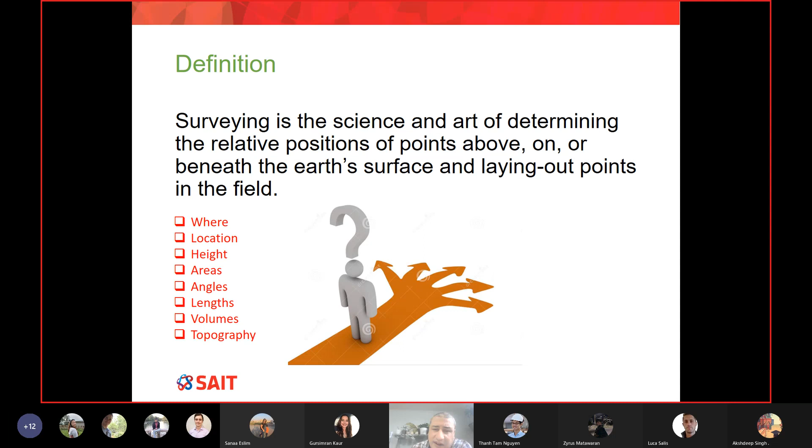Okay, let's start. Surveying is all about one word, one question. As soon as you ask the question 'where,' the answer is surveying. Whenever you say where, it means the answer comes from surveying. This question can expand - instead of just location, I can ask about height or height difference, areas, angles, length, volumes, topography, like where are the flat areas and where are the steep slopes. You can see from this slide it looks very simple - once you say where, we're doing surveying, okay? However, I can tell you, things will get complicated.

Surveying has so many branches, and every branch you can look at from a different perspective. You can classify surveying based on many aspects. We can classify it according to the area to be mapped. Sometimes we map a small area on the earth, and sometimes the area we want to map is as big as Alberta, or Canada, or the entire world.

Is it the same? Are we going to use the same equipment, the same procedure, the same calculation? The answer is no. We have different branches, and I will talk shortly in more detail about plane surveying and what is called geodetic surveying.

We can also look at surveying from a different perspective, which is the field of application or the objective. It means doing a tunnel survey is different from a deformation survey, or building a high-rise building, or doing surveying underwater. Yes, it is completely different - you need to change the entire procedure and sometimes use very specialized equipment.

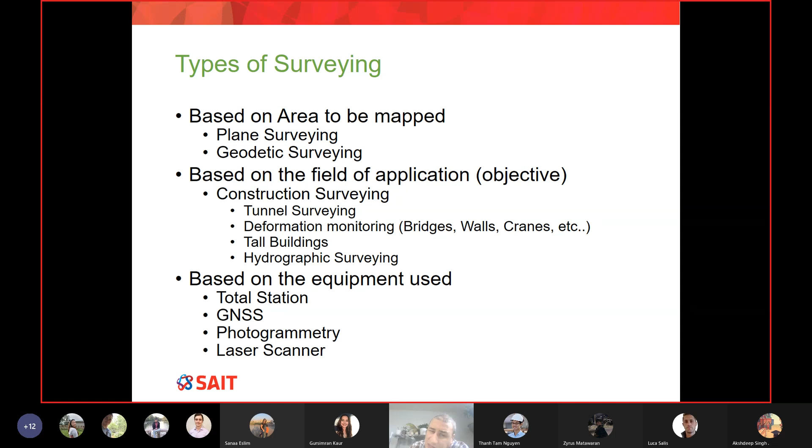So let's start and give you more information about each of those individual categories. Now let me ask you this question - what do you think about the actual shape of our Earth?

Anybody in this class still believe that our Earth is flat? I want to know - I'm interested to meet you if you still think our Earth is flat. Okay, so our Earth is not flat. However, it looks pretty much like a sphere. It's not really a perfect sphere, but pretty much like a sphere.

So how can this affect my survey? Now let me ask you this question - if you fix three points on the ground and you have equipment that can measure angles, which is a total station... for example, I have three points, point A, B, and P, and those three points are on the ground. I go ahead and measure the angles, like alpha, between line AB and AP.

Now let me ask you, when you measure those three internal angles of a triangle, what do you think - should the sum of these angles be a specific number? I need some help, please.

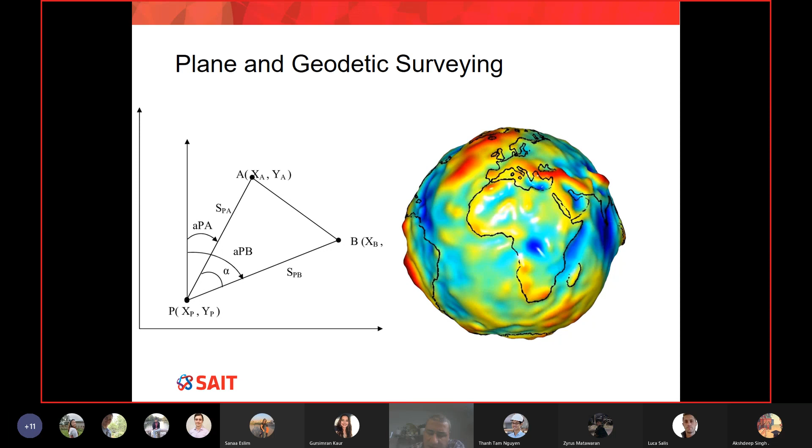You know what? I know that I have made a 30-second error in my measurement, if you agree. Now, you can see I used plane trigonometry to do my calculation. However, if I just expand the area, which means A and B and P are not close to each other...

What happens is if I simply take 3 points far apart, I will take it to the extreme. Let's say I have 3 points, alpha, beta, and gamma, and alpha happens to be on the North Pole, and beta and gamma are on the equator. Probably you're familiar with the words North Pole and equator, are you? Yes, I think so.

Okay, now let me ask you, please look at my screen, the picture on the right. As I said, I pushed the extreme, so I pushed these 3 points very far from each other. I'm asking you right now, do you still think the internal angles of this triangle, which is not really a plane triangle anymore, it is called a spherical triangle, do you think the sum of the internal angles is still 180? Yes or no?

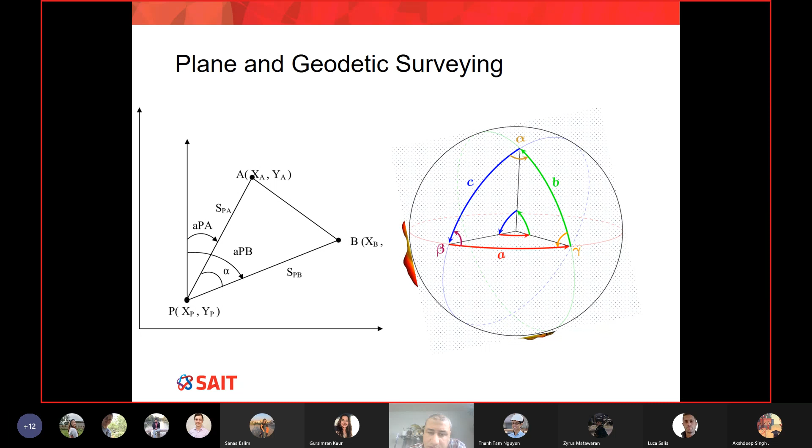And in my class, at the very end, before we end our semester, I will give you more information about geodetic surveying. Okay, that's only for now.

Now, let's take you to another domain, which is tunneling. So we are trying to build a tunnel, and we want our surveyor to help us build it. Because I can tell you, there is no construction without surveying. I want everyone to believe this. There is no construction without surveying. Without surveying, you cannot build almost anything. You cannot build anything without surveying.

So when you're trying to build a tunnel, and I think we have a few tunnels in Calgary, okay, anybody can give me an example of tunnels in Calgary similar to what you see on my screen? If you take the C-Train, you will know.

So tunnels are a complicated topic, and we can build them in two ways. The first and easiest one is what you see on my screen, simply called open cut or cut and cover. You just dig the ground, install your retaining wall, then if you need to cover it, make a box section, build the slab, and finally cover with soil, and it's good to go.

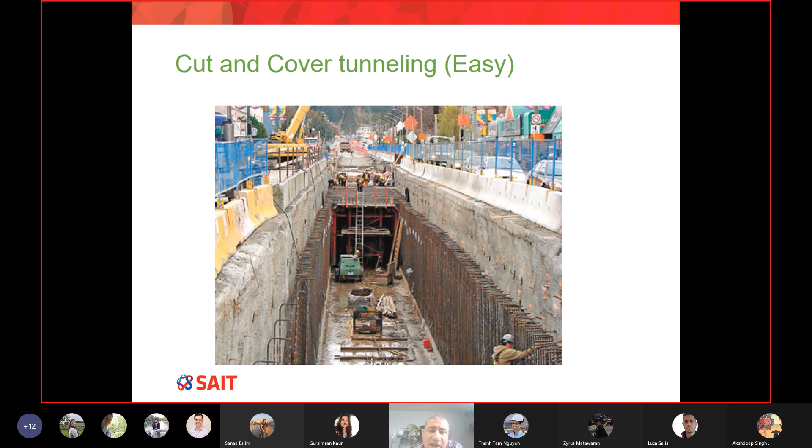The thing is, this technique doesn't work all the time. You know why? Because you have to make an open cut.

Look at this situation: you have a city that's already built, a few hundred years ago - like Cairo, built more than 1,000 years ago. Now the city is there and you don't have much space, and you have a transportation problem. You want to build an LRT. How can you do that? Should you demolish all the buildings, make the open cut, build the tunnel, cover it with soil, and then build all your buildings again? Unfortunately, this is not engineering.

So engineers came up with a marvel of a machine called the TBM, tunnel boring machine. Unfortunately, here in Canada we don't use it because we have lots of space. But in other areas of the world where space is very tight, this is the way to go.

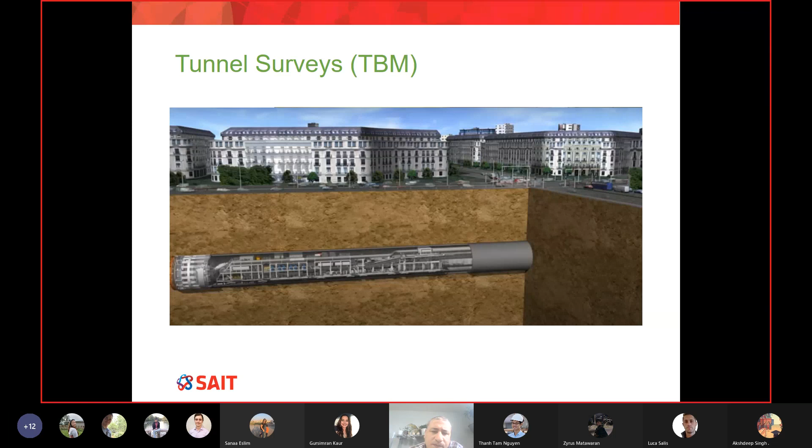I'm going to share a video with you, I think this one is from the UK. Let's see the video and see this marvel. My intention isn't to show exactly how this machine works in full, but to give you an idea of how these tunnels will be built. I won't show you the entire video, just about half, until you get the idea of how this machine works, and then we can move on to how surveying connects to this kind of work. Let's see.

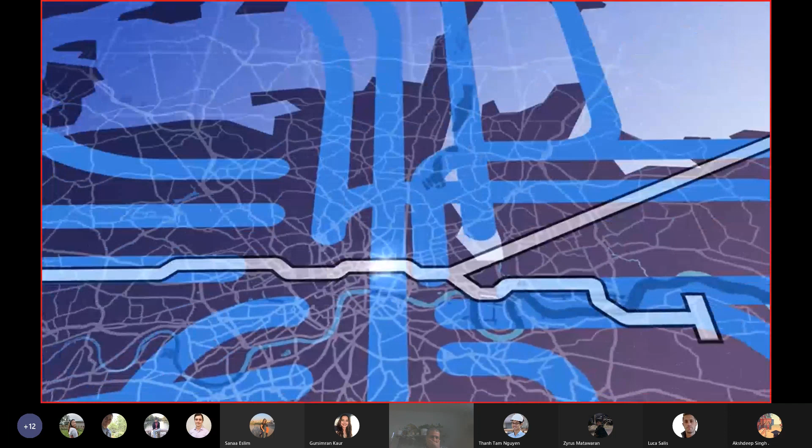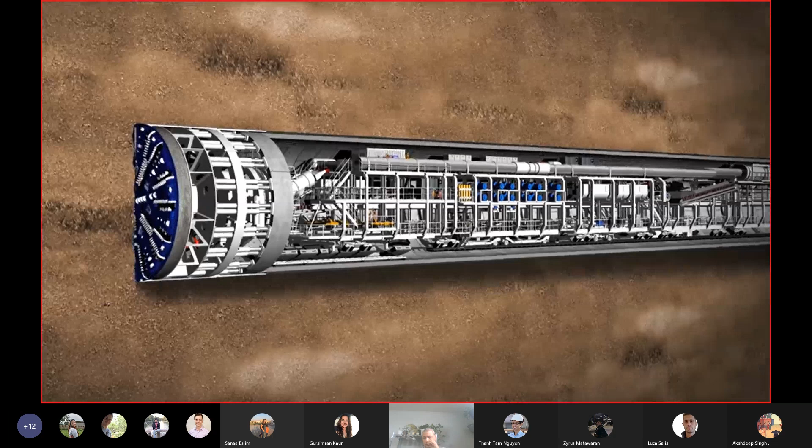When it opens in 2018, Crossrail will connect 28 existing stations to the West End, the City, and Canary Wharf through 21 kilometres of new twin-bore tunnels under central London. 8 tunnel boring machines, or TBMs, will drive through the ground to create Crossrail's tunnels. A TBM is 148 meters long and weighs 1,000 tons - the equivalent of 14 London buses end to end, and a staggering 143 buses in weight.

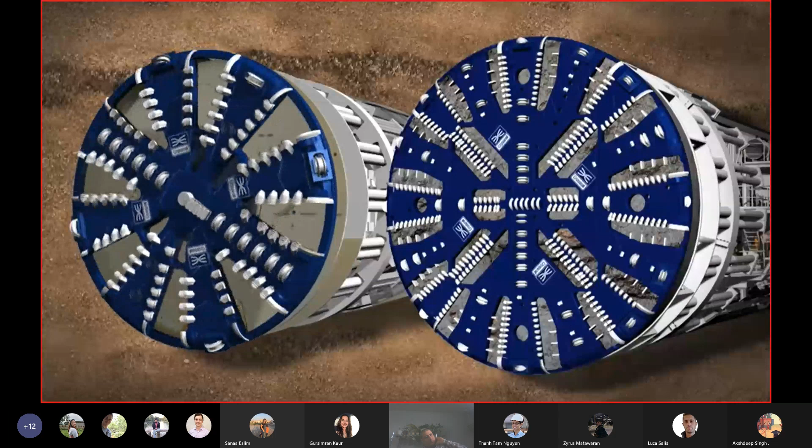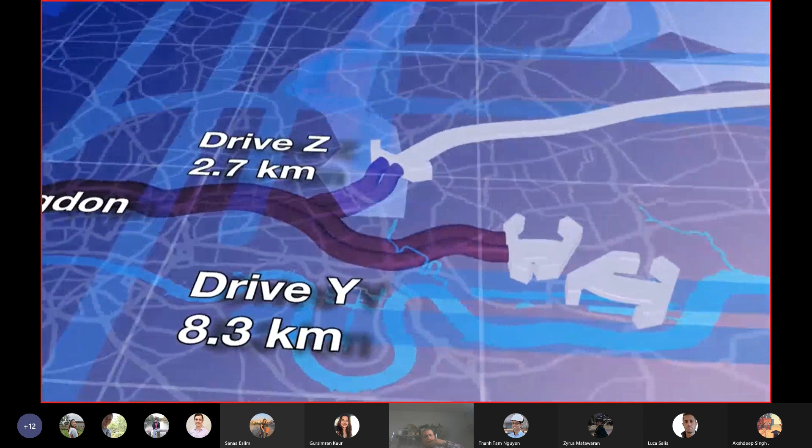It has a rotating cutter head at the front and a series of trailers behind housing all the mechanical and electrical equipment. There are two types of TBM used by Crossrail: earth pressure balance TBMs and mix shield TBMs. 6 earth pressure balance machines will be used for the 18 kilometers of tunnel through clay to the west and riverbed deposits in the east, while 2 mixed shield machines will drive tunnels through the chalk beneath the River Thames. Depending on the geology below and the buildings above ground, each TBM will travel between 90 and 150 meters each week, ending up within a millimeter of where it needs to be.

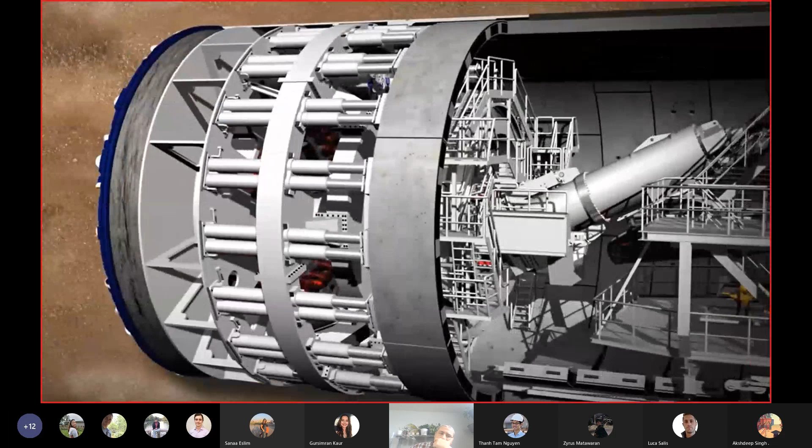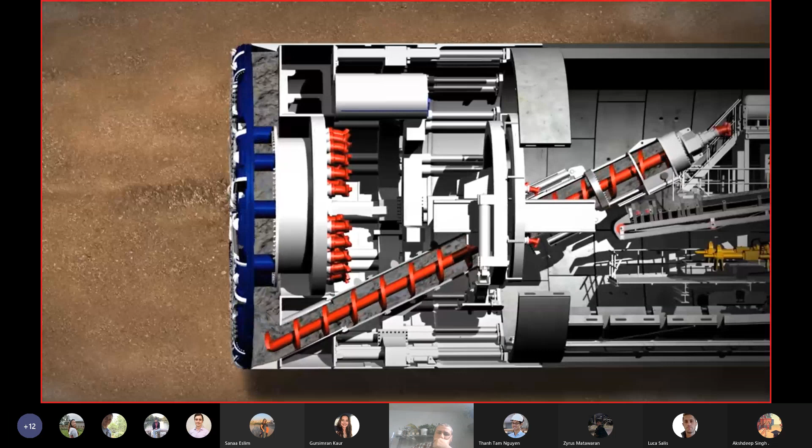The first part of the TBM's work is the tunneling phase. The earth pressure balance TBM has a cutting wheel pressed against the tunnel face by hydraulic cylinders. Inside the cutting wheel, disc cutters and scraping tools loosen the material. If the earth is unstable, to stop the tunnel face collapsing or digging too fast, the TBM uses the soil already dug out by the cutting wheel to support the tunnel face. This creates a stable environment for tunneling to move forward. The tunnel face is continuously monitored by pressure sensors, which check the turning power of the cutting wheel and the screw conveyor, and keep track of the material excavated. The material is then taken away on conveyor belts.

Once the tunneling phase is done, the cutting wheel and screw conveyor are stopped and the ring building phase starts. A complete tunnel ring consists of several lining segments made of pre-built reinforced concrete. These are made in a special factory above ground.

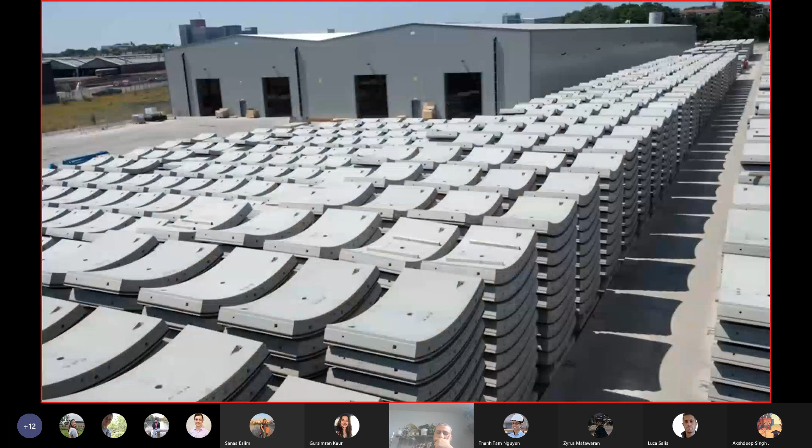They must match the exact size required and are taken into the tunnel on flatbed rail cars. The concrete segments are fed in by the segment feeder and lifted into place using a vacuum. The hydraulic cylinders are temporarily retracted in order to provide enough space for the new segment.

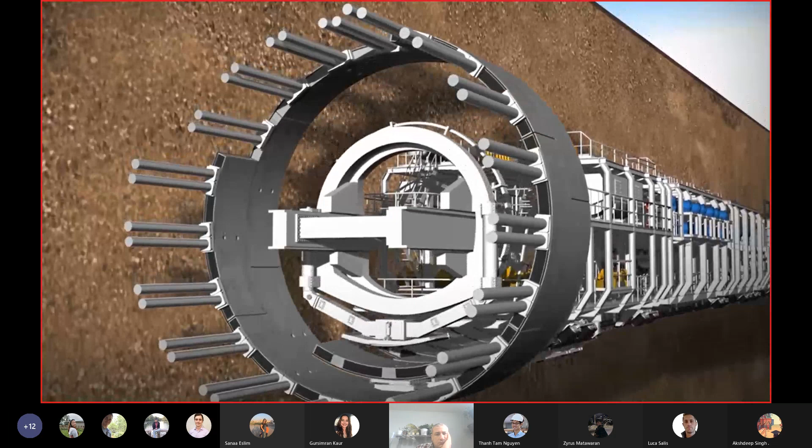The segments are positioned with millimeter precision and held in place by cylinders before being finally bolted into position. The conical keystone is put in from the front to complete the lining ring. Each individual tunnel ring is built in a slightly conical form. This means that curves can be built along the tunnel route by changing the direction of the cone. The hydraulic cylinders are extended again to secure the segment into position.

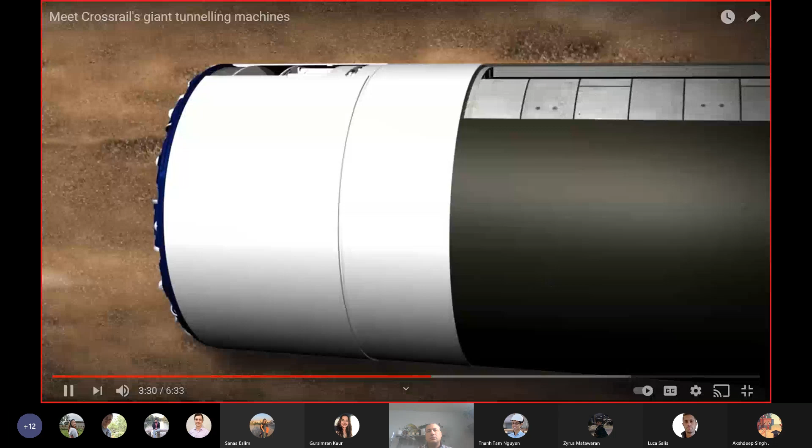During all this work, the people and machines are protected by the shield skin from the saturated ground where water is under pressure.

So I think that's enough for you to understand how this machine works. And this machine is amazing. I've been myself to one of those machines back in 1995 when I was an undergrad. And at that time, they were building a big network of tunnels in Cairo.

What I want to show you is how surveying has been affected and adapted to control this machine to navigate underground. Remember, this machine is dropped at the station, and then it navigates itself for a few kilometers to go to the next station, completely blind underground. And it has to be within a very small tolerance. It has to come out a few millimeters away from where it should be. So which means we have a very small tolerance of errors.

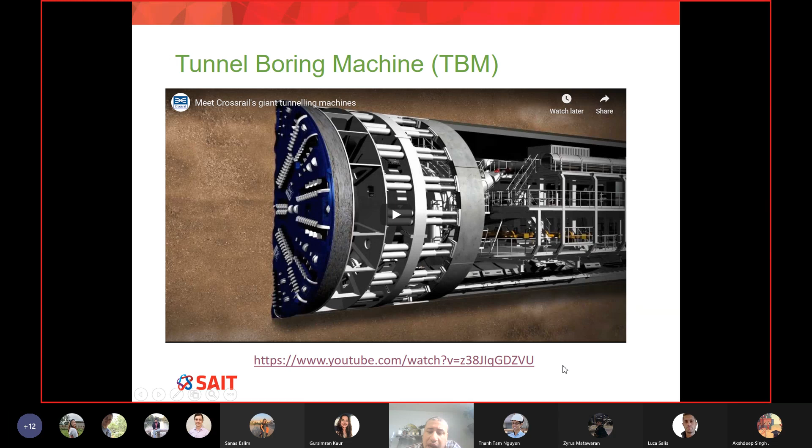Now let me show you surveying in tunnels. I'm sorry, I have to go one step backwards. So this video, I'm going to show you the full video, and I will show you the challenge of doing surveying within a tunnel. Please watch, and we'll run some discussion after you guys watch the video.

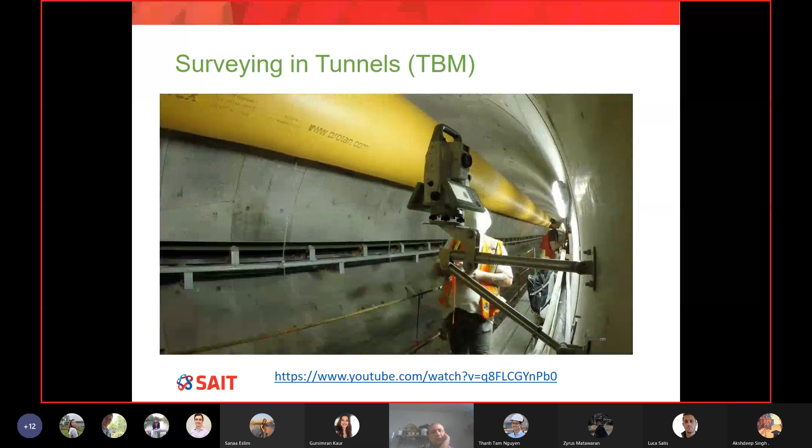So I'm going to start the discussion here by asking you, is this setting similar to what you've seen or watched or done yourself in first year? Like total stations mounted on top of a tripod, I guess. I need some confirmation, please. Again, I cannot see you, so I need some interaction. What do you think? Is this picture the same as what you did before or watched before?

Seems similar. So it's similar, which means you've seen a total station mounted on a bracket hanging from the wall. Is that a normal setting for a total station? For me, no. Normally it's on the ground. It's easy to set up on flat ground, but it's difficult to balance it in the tunnel.

Exactly. So normally a total station will not be set up this way. Normally a total station will be on top of a tripod, and the tripod is on the ground. We cannot do that here. You can see there is a rail, and if you look at the video carefully, there is mud, there is underground water coming through the tunnel. So it's very difficult to do that in the tunnel itself. So the only way you can do it is to have a mounting bracket that hangs your total station to the walls of your tunnel.

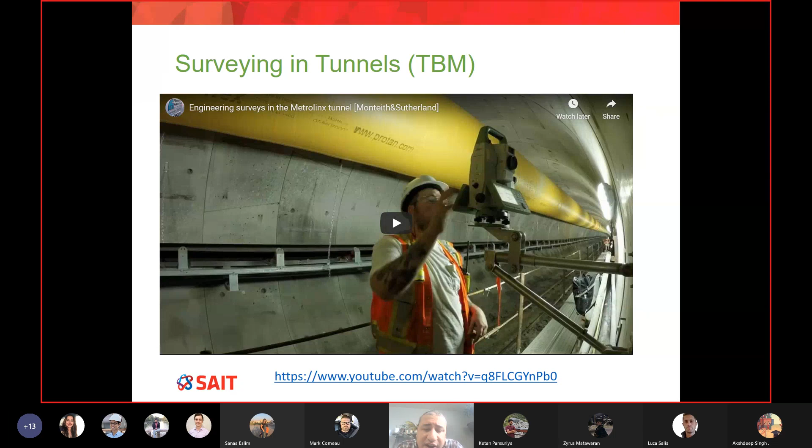I would say it's a disaster and you cannot fix it. That's why tunnel surveying is very, very special. We need to get a fresh measurement every day for the traverse points. You can imagine the difficulty - there's no favorable condition in terms of light or even oxygen. It's very, very serious surveying in tunnels.

Now another example for you. I want you to watch the video and then we can chat. Okay, let's do this.

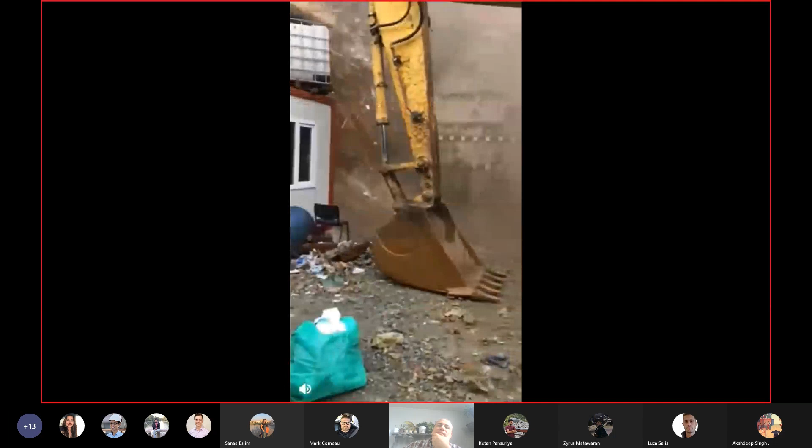Okay, so what you've seen in this video is simply a retaining wall failure, as the title says. A retaining wall is something that is very common. I'm not sure if you know some examples of where we do retaining walls. Any help? Where do we need retaining walls? Did you learn any structure? Have you seen any structure where there is a retaining wall to support the soil?

Similar to this, if you were to go downtown, by a bunch of other buildings, and you had to do a foundation. Thank you so much.

Really, I was about to tell you this example. Like in downtown, I witnessed myself over the last 5-6 years, there were a few high-rise buildings, and the city will not allow any of those structures to be built without providing enough parking for the users of the building. It's a must, okay? So we need to build a parking area below the building, and to provide enough, you probably have to build maybe 4 or 5 levels of parking below the ground.

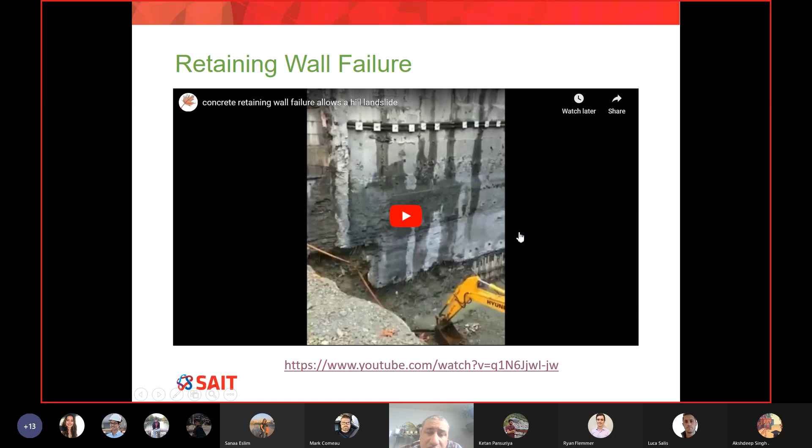What happens if I'm surveying the point every day and find significant difference between the coordinates over time? This tells me the wall is potentially moving, and in this case you have to do something. Probably you'll have to add more soil nails to make your wall stable. So you guys have seen the video and you appreciate that deformation monitoring is a must, not a choice.

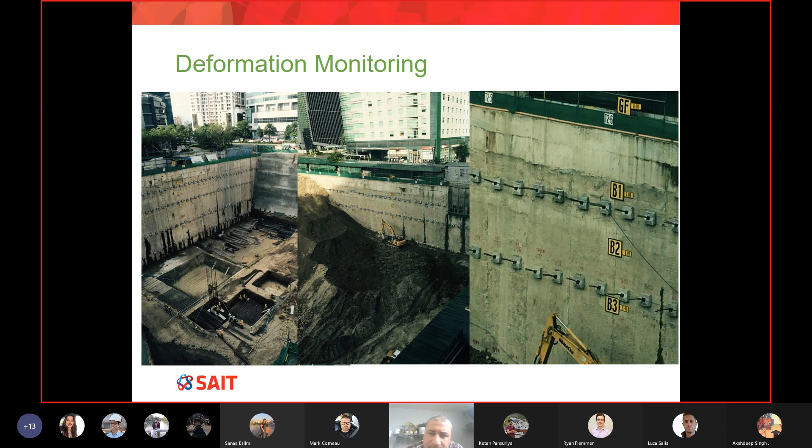Okay, so same idea, we have a retaining wall. They are trying to build some barricade, and you can probably see there is a 15-20 meter big hole in the ground.

And I'm going to explain this later on, but our target cannot be just like the prism that we used last year. If you've done in-class survey or online, you learn about the prism. The prism is something like a glass, typically used in normal survey. In this kind of survey, which is deformation monitoring, we don't use that kind of survey, like prism.

Look at the top right corner of my slide. You see something called paper prism. Paper prism, and those are very suitable for this application. So what we do is take those paper prisms, which look like a sticker, and we stick them using epoxy on the walls, and we keep them for 1 year or 2 years, until the excavation is done and until all the foundation is done and we are at ground level.

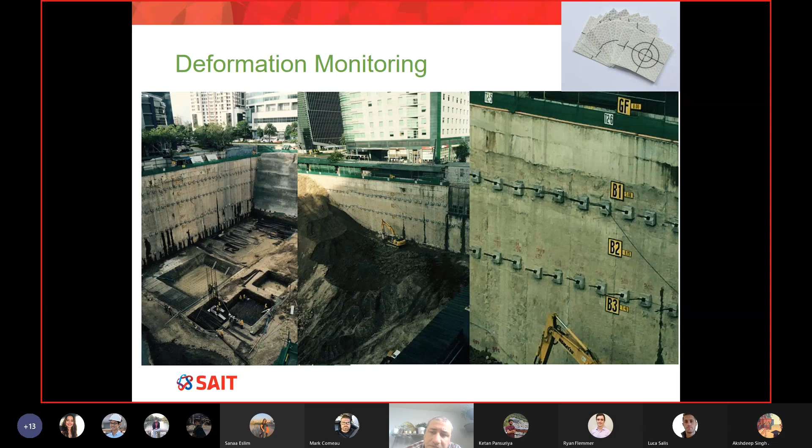Okay, one more example. I think we have 10 minutes, so probably we can do that as well. High-rise buildings, those with 30, 40, 50, 80, 120 stories - do you think we are going to use the same surveying that you learned in first year to build a high-rise building? Now let's see.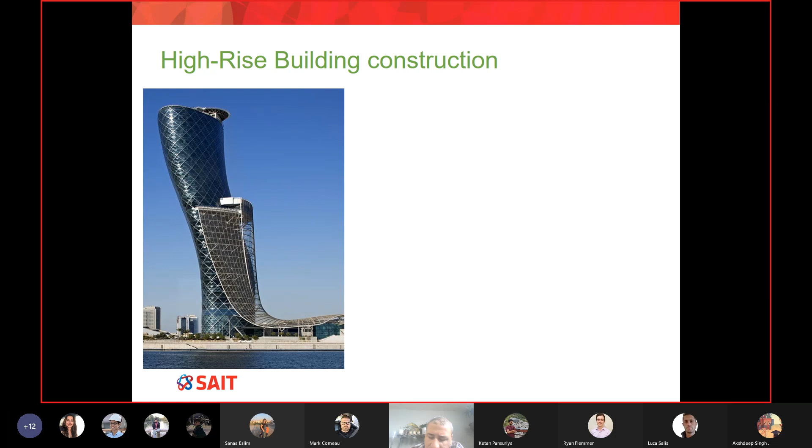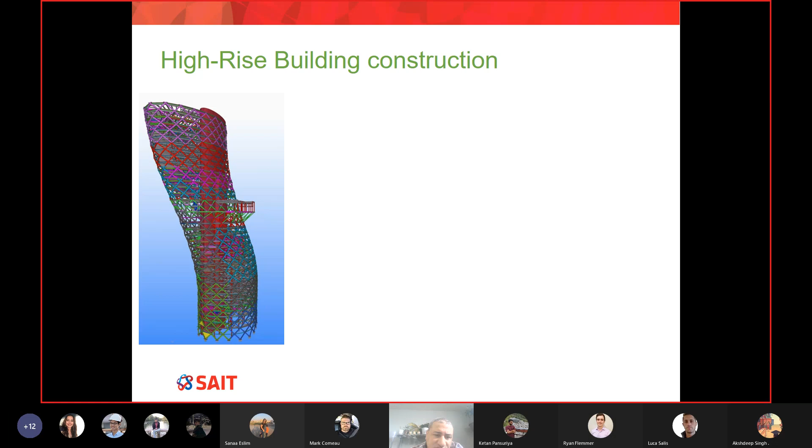But I can tell you, when you learn about structures, bending and torsion, you will really appreciate how this building is standing. If you know about construction, you will also appreciate the structural engineer who came up with this skeleton and the core in the middle, the concrete core, that makes this work. Look at my screen - this is a 3D model of the structure, including the space bracing and this red concrete core in the middle.

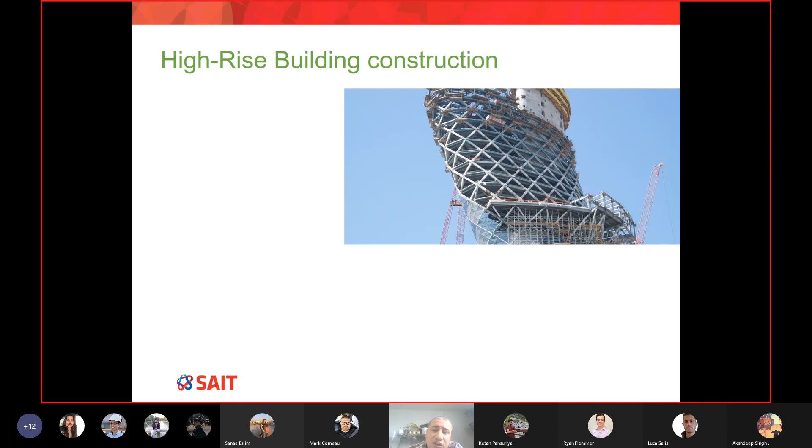But I'm asking you, do you think this structure can be built without surveying? Those steel members are cut to a length with a very small tolerance. How can you put these things in space in the exact place as designed? The answer is surveying. Without surveying, although there is great effort from the architect side and great effort from structure, it is very challenging - surveying has a big challenge and role in building these structures.

I'm going to show you a video so you can appreciate what kind of special equipment we use in surveying when building a high-rise building. Okay, let's do it.

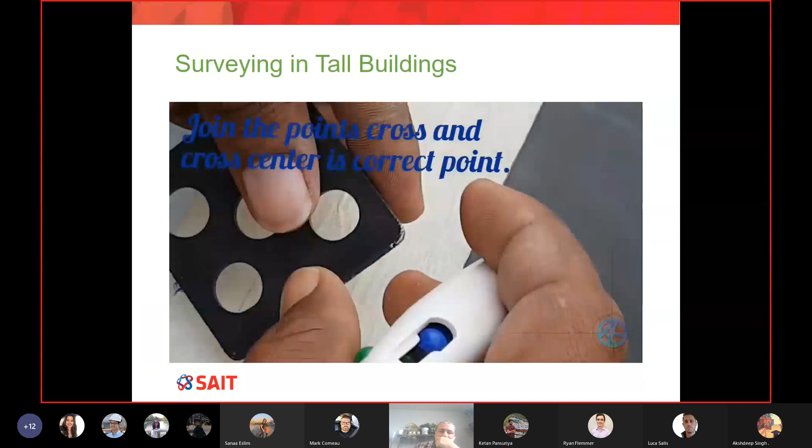So the first part of the video is kind of slides going very fast, and I bet you weren't able to read anything. But what I want you to focus on is exactly what they are doing right now - the person on the bottom on the main floor and the person on the higher floor. Can anybody guess what those guys are doing right now? Any smart guess?

Don't be scared - how far has the building kind of deviated as they went up?

Actually, they are not really measuring deformation, because deformation is something that happens over time. If you wanted to measure that, you would need to do this process now, and then repeat it in a week or a month - there must be time separation where deformation takes place. But if you see the video, everything happens in a few seconds, and deformation doesn't happen over a few seconds.

So I know this isn't easy, and probably you've never seen this before. But the thing is, when you build a high-rise building, columns must align vertically - all the columns must be on top of each other. And you guys, by now in CVT, you know what happens if my columns are shifted every floor.

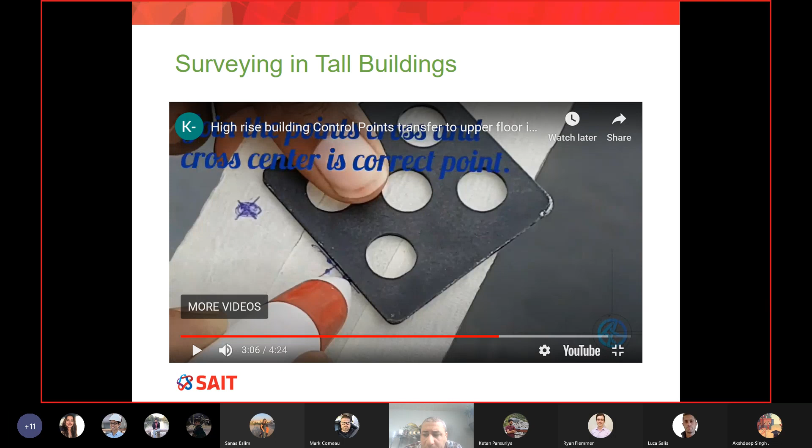Anyway, there are 2 minutes left, and I think there is still one last example. Probably we can cover next class a very specialized kind of surveying called hydrographic surveying, where the surveying happens below the surface of the water for so many applications. We'll do that next class, but for now, do you guys have any questions about what we discussed in class today?